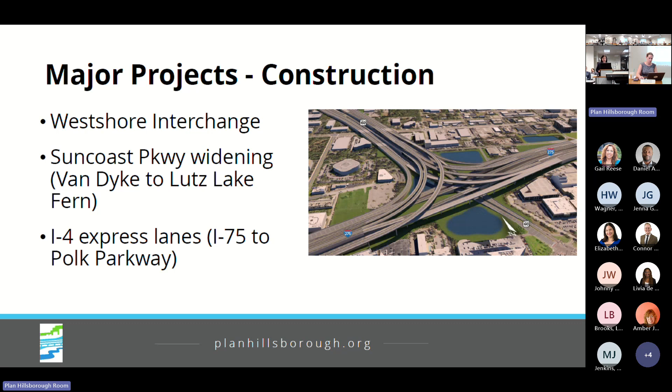Our partners at the Turnpike are continuing to advance the Suncoast Parkway widening in the northern part of the county. And DOT is accelerating development of two lanes, one in each direction, on I-4 from I-75 to the Polk Parkway.

As we mentioned last time, there are 6 projects totaling about $32 million around the Hillsborough College area. As that redevelopment project is still in the works, these projects are put in the TIP to address whatever ultimate development will be placed there.

DOT is still actively determining what these investments will be pending the land use decisions. But the two things they do know for certain: planning to widen this segment of Air Cargo Road and Tampa Bay Boulevard to have more capacity, as well as adding a signal at Dale Mabry and Steinbrenner. The rest of the projects are in there - they know intersection and safety treatments will be needed, but that money is being put aside as more details are confirmed for this redevelopment.

Just wanted to bring a few projects to your attention, like what was going to start construction soon, so in fiscal year 27. Within the city of Tampa, there are some intersection improvements near Busch Gardens, near Annie Street and 30th. Rigid pavement reconstruction at Adamo and 34th Street. Repaving of Hillsborough Avenue in the central part of the city from Park Road to Central Avenue. And then a traffic operations improvement near the University of Tampa at Kennedy Boulevard and Plant Avenue.

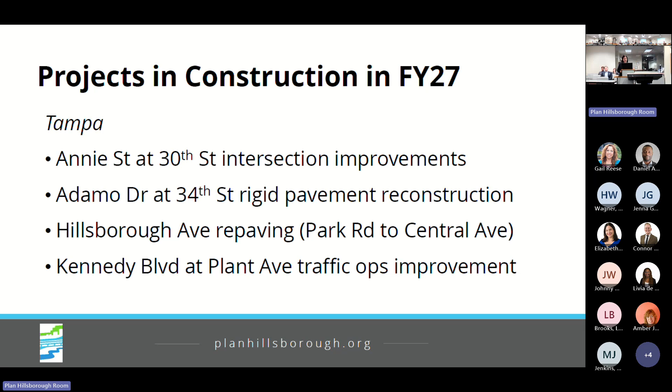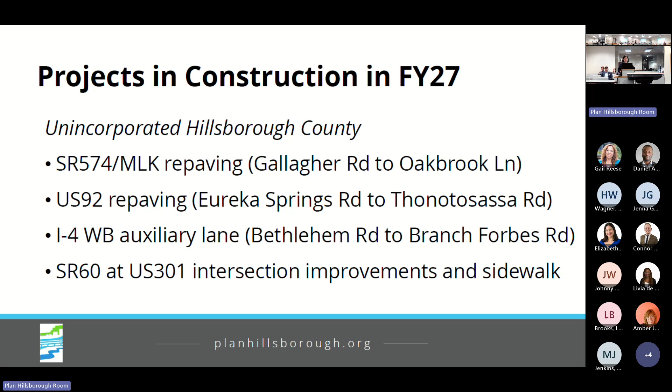Looking out into the unincorporated part of the county, mostly East County, a repaving of MLK from Gallagher to Oak Brook, as well as a repaving of US 92 from Eureka Springs to Thonotosassa. DOT is still moving forward to adding a westbound auxiliary lane on I-4, a small segment from Bethlehem to Branch Forbes Road, just to continue to help move traffic on I-4. So this will still advance independent of those express lanes. And then at the intersection of State Route 60 and US 301, some intersection improvements that also include sidewalks.

Close to the I-75, I-4 interchange at the Mango Road and Old Hillsborough Avenue intersection, the county is working to put in a signalized intersection there. In South County by the new Moffitt Center, there are more intersection improvements planned for the intersection of State Route 674 and College Avenue. Plant City will see some new sidewalks come online around their middle schools.

And then the last project I wanted to bring to your attention, because it's gotten some interest from the Citizens Advisory Committee, is that the I-275 widening from Hillsborough to Bearss, which is in our long-range plan, which is a priority project. This year it's also in the TIP, but there's no funding program to it, so if you look closely at all of these columns, you'll just see a bunch of zeros. And in full transparency, I wanted to make sure the TAC knew this project was in here. But what we've heard from Secretary Hall is that this project probably won't advance until like 2035.

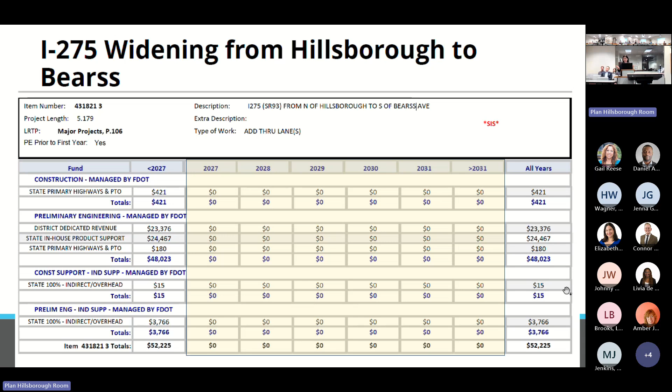That's consistent with DOT's cost feasible plan - not really much to see here, but again, in the interest of transparency, wanted to bring that to your attention. This is just a snapshot of essentially DOT's long range plan, their SIS cost feasible plan, that shows that design should occur sometime between 2035 and 2040, and then construction is tentatively planned to occur sometime between 2046 and 2050.

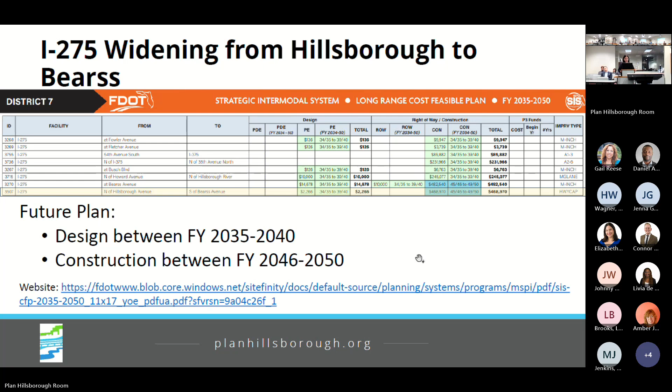So we're getting to the home stretch with the TIP. We've mailed all of our flyers, put out road signs, did newspaper ads. We have this meeting, the CAC, and then it'll go to the TPO board for adoption next Wednesday. So the requested action is that the TAC consider recommending approval of the TIP, but I'd be happy to answer any questions or comments you might have.

Okay, thank you. Any questions from the committee?

I have a question. So last time we talked about this there were projects that moved out and things that moved in, and there wasn't really a good explanation, and I'm not here to rehash that, but it looks like several projects added around Hillsborough College. Were there projects that moved out because of that, or was that new money?

That's a great question, and I'll start and we'll see if you have any other thoughts. My understanding of that money around Hillsborough College, that's not part of the SIS reprioritization - they are separate. Alyssa Joyner at DOT: those projects came down from central office and they weren't a part of that. The SIS reprioritization happens annually and kind of shuffles around those projects, and these didn't come out of that or move anything else out of the TIP or anything. Okay, thank you.

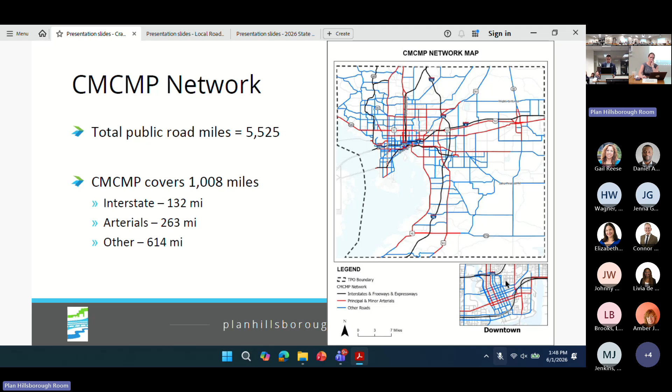Once we have the baseline, we want to identify where the congestion is—what we call congestion hotspots, identifying which roadways are most congested. We used a couple of measures: first, percent time congested, identifying roadways congested 50% of the time or more. We also evaluated vehicle hours of delay, picking out the most congested roadways with significant delays. Last but not least, the planning time index, which measures travel time reliability from the driver's experience, identifying the least reliable roadway corridors within the county.

Based on this evaluation, we identified about 170 miles of congestion hotspots within the county, which you can see on the map on the right—the red segments are the congestion hotspots.

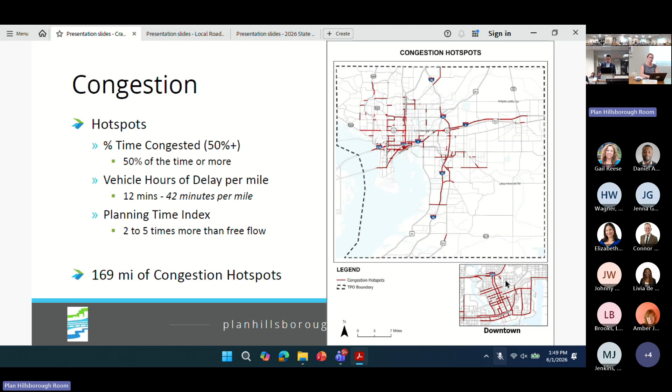The second category is safety hotspots, where traffic safety problems exist. Based on data evaluation of traffic crash data, crash frequency, and severity, we identified the top 25 safety intersections, and also about 140 miles of safety corridors that have safety issues.

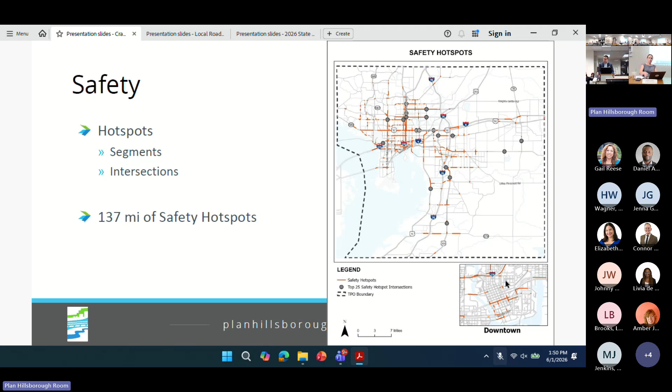So last but not least is the resiliency. We really try to understand what if extreme events happen, which roadways will be affected. So we look at the storm surge 1 feet scenario, the sea level rise 1 feet, and also the 500 years rainfall that's going to cause flooding within the county boundary.

Based on this set of criteria, we have identified about 113 miles of resilience hotspots. As you can see, the red segments on the maps are along the coastal area. You can also find some corridors inland where the elevation is lower.

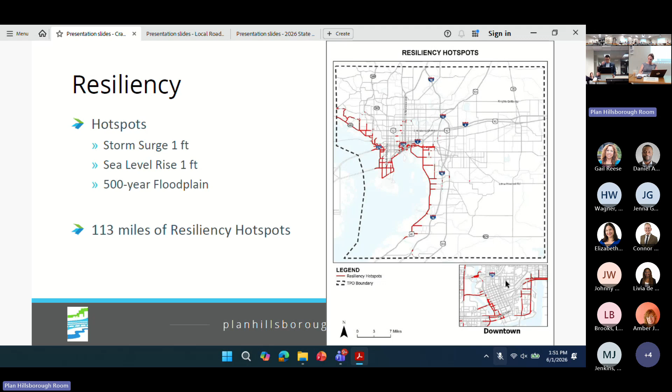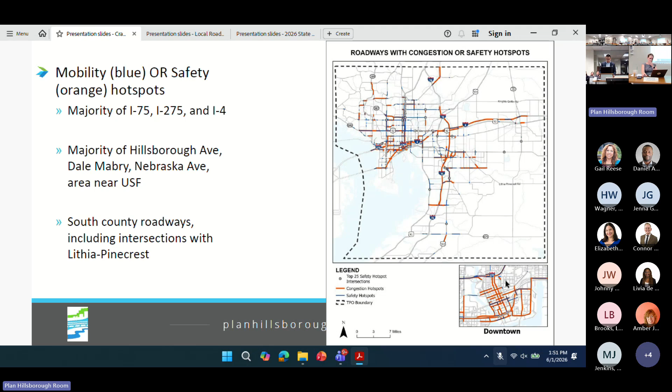So we specifically focus on the congestion and safety hotspots so that we can know the big picture of where the problem is. As you can see from the map, the majority of I-75, 275, and I-4 are part of this bigger group of hotspots, and also the majority of Hillsborough Avenue, Dale Mabry, Nebraska Avenue, and roadways near USF. You can also find some roadways in the South County area where there might be congestion and safety hotspots.

Once we have that, the next step we did was focus on the roadway corridors that are both congestion and safety hotspots. Those are the kind of corridors or areas that we should prioritize our resources or attention on in the next couple of years.

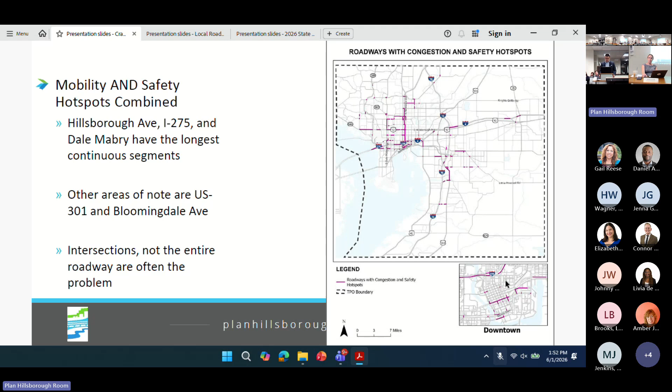So we look at roadways with both congestion and safety hotspots, as you can see from the map on the right. Hillsborough, 275, Dale Mabry have the longest continuous segments, and you can also find corridors that cross the city and the county boundary. This gave us an unranked list of corridors which have both congestion and safety issues.

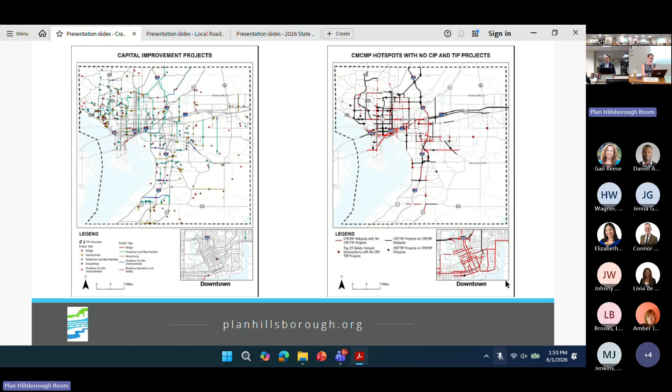Let's skip this. So once we have all the data evaluation, the next step is we want to know where we should implement strategies. But the first step is to leverage existing or planned projects so we can identify which corridors do not have any planned or existing projects. So we overlay our hotspots with the capital improvement projects. I'll show you on the next slide.

As you can see from the map, these are all the CMP network segments we have evaluated. The black corridors are roadways with existing transportation improvement projects. The red ones do not have any planned or existing transportation improvement projects. Most of the gaps can be found on Hillsborough Avenue or Dale Mabry. If you look at the downtown zoom-in map, a lot of downtown streets, Selmon Expressway, and Kennedy Avenue don't have any planned or transportation improvement project right now.

Another effort that came out of the CMP effort is this: we developed a strategy toolbox because we think there's no one-size-fits-all strategy to deal with different traffic problems. So we developed a strategy toolbox to help planners and engineers deal with different traffic problems. This toolbox also comes with implementation cost and implementation timeline, so planners and engineers can have them handy when they try to solve different traffic problems or safety issues.

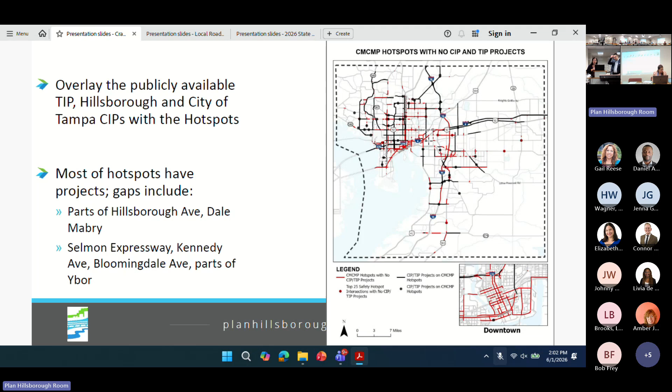Okay, any other questions? Okay, I guess we will need a motion for this one. And it's right there on the screen conveniently for you. Recommend that the TPO board accepts this CMCMP update.

Okay, so a motion, a second. Any other discussion? All right, seeing none, everybody in favor say aye. Aye. Anyone opposed? Okay, motion carries unanimously. Thank you.

The next item on the agenda is the local roadway resilience countermeasures, with Matthew Pleasant from Applied Sciences and Wade Reynolds, TPO staff, introducing him. This has been a great study, and I think we've put together a great toolkit of options to use, and these exemplary projects are a good start. Thank you all.

Good afternoon, Matt Pleasant, Applied Sciences. So you guys actually just saw this a couple of weeks ago for status, so here to present the final product. A lot of the presentation is highlights from the guidebook, but I'll go through it as a reminder of what we were looking at.

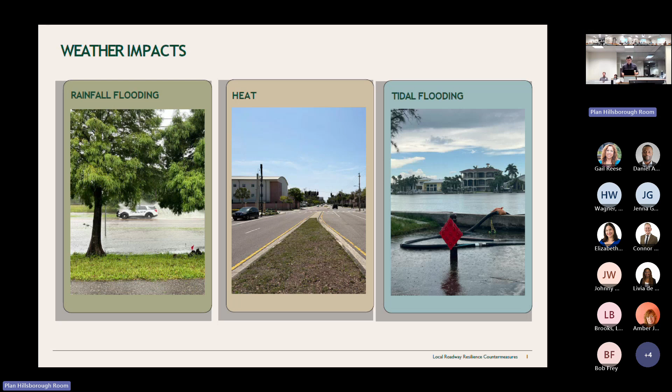So you might see an acceleration of the need for maintenance, the shortening of the infrastructure lifespan, and then the impact on the basic level of service and our ability to use roads during certain conditions. And then the impact on drivers, bicyclists, and pedestrians and their comfort. So we wanted to speak to all 3 of these.

So just to go back to a project overview of the steps that led us to this point: we started with corridor selection. We wanted to find 3 representative corridors that were emblematic of these threats, not necessarily find the solution for these, but use them for strategy development, developing ideas.

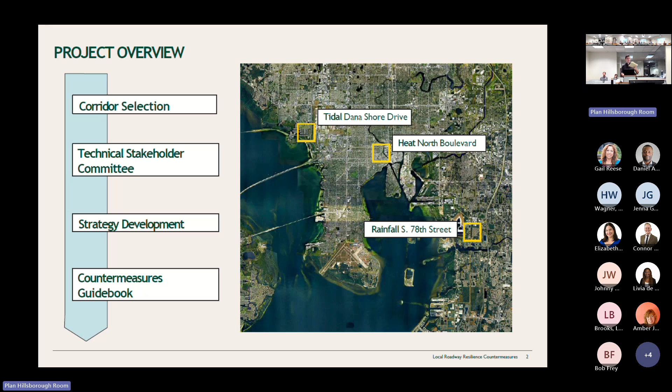We brought those to a stakeholder committee made up of engineers and planners from the county, the airport, and had a really great discussion with them about what they're already doing, what they would like to do, and some of the challenges they're facing. Then we moved into strategy development and pulled everything together into a guidebook, which will be today.

So the guidebook is meant to be very well illustrated, packed full of examples with costs. You'll find a lot of those organized by the threat: by heat, by tidal flooding, and by rainfall flooding.

And with each, it was helpful for us, and we thought helpful for practitioners, to develop a diagnostic framework. So if you're looking at an area facing these issues, how do you even begin to think about what might actually be a solution? I'll show a couple of examples of that. And then for each of those representative roadways, we presented it as a case study where we applied that framework.

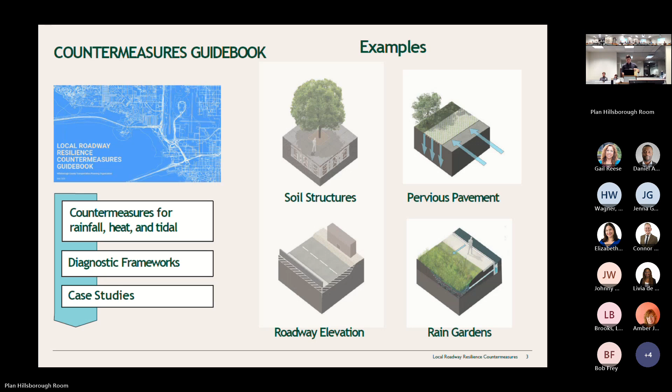So this is an example for rainfall flooding, presented as a series of questions. Some seem really basic, like where is it flooding, but you got to start somewhere. Then, where is the runoff occurring? Where are the bottlenecks in that stormwater system contributing to flooding? Defining costs - what can we actually affordably achieve? We're trying to think of a solution, and then evaluating maintenance.

Is it simply a maintenance issue that's contributing to flooding? And then if it's in a coastal area, you'd also want to see if that rainfall is actually being impeded by tide elevations too. So that's happening in plenty of places already.

So really, this is kind of trying to pull back the curtain a little bit. These questions get asked a lot with the stormwater master planning process that we go through a lot, and it's a process that's happened parallel to transportation planning, land use planning. There's plenty of interesting data that you can input to these that mirrors a lot of what the planning commission is concerned with, TPO. So part of what we were hoping to do with this project is kind of pull that curtain back a little bit, break down that silo a little bit.

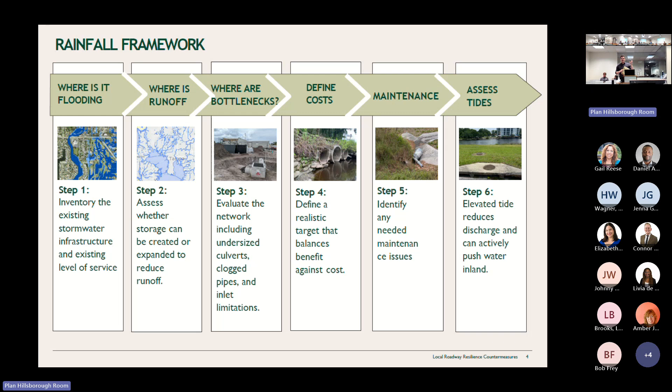So I'll go through some of the strategies now. So rainfall strategies - one that we included here is permeable pavement and permeable pavers. There's actually two different categories of these, broadly speaking. Permeable pavers have a little joint between them that allows the water to infiltrate between them. And then there's porous concrete where the water can actually absorb through the concrete. That's what that picture is, the lower hand side. That's a parking aisle in Martin County. They've installed that in a roadway.

They actually elevated it as well, as part of this flooding solution. And you can see these permeable pavers. This in the upper right is an alleyway in Ybor that was recently developed. That's full of them and probably helping contribute to their ability to store stormwater. The issue with these is that they are more expensive, about 10 to 20% more expensive than these traditional materials. So I have to think that they were using those to help them meet some of the stormwater criteria for the development, to help them with reducing their impervious surface on the site. So it's kind of a smart use of it.

And then in the lower left is True Grid. That's actually a proprietary name for that product - there's different things, different products, but it's like a molded kind of grid that's full of that aggregate material. You can see it in parking lots that you go to. Bamboozle in Seminole Heights has that, probably for the same reason. They were rebuilding that property, making the restaurant. They're probably trying to meet some stormwater criteria on their site. So the parking area is full of that.

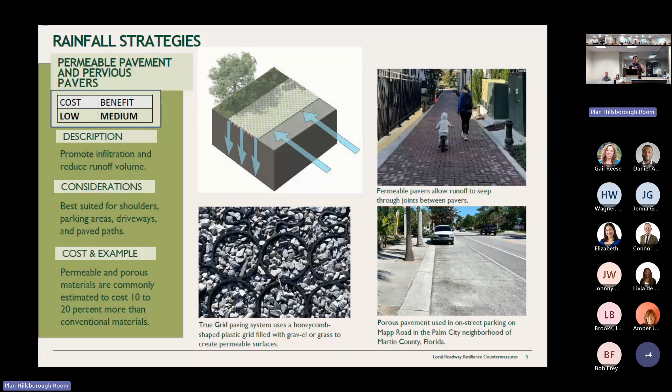So moving on to green infrastructure, this is a pretty big category that we're including, spanning anything from rain gardens, bioretention, and bioswales. We have some pretty good examples of this in Tampa specifically. I would say they're not widespread use yet, but we have some pretty good examples.

So the El Prado Stormwater Garden in South Tampa, that's El Prado - the city actually used some grant money from the SWIFT fund to buy 2 repetitive loss properties to turn into a stormwater park. Repetitive loss properties mean that they've been flooded more than twice, I think, in the same 10-year span, and they've had to file for claims. So there's a benefit to removing those properties from the floodplain, so they created this to help with stormwater in the neighborhood.

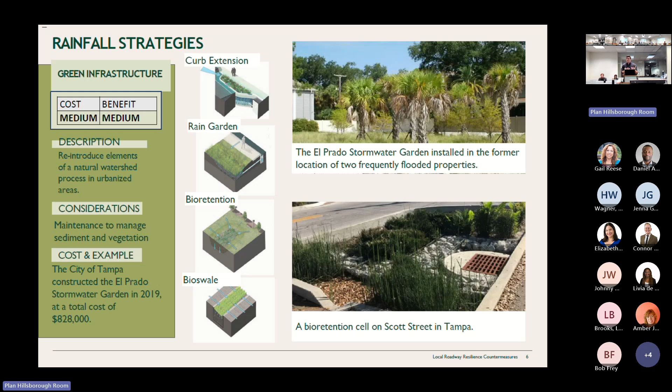If you go out to Scott Street, that's the picture below. That is all the way from Orange Ave over to 7th, across Nebraska. You have green infrastructure treatments all along that road. So you'll see things like these gabions that are acting as a baffle material to help filter the water, help it infiltrate. I don't know the story behind that, I don't know if anyone with the city can speak to why that was done specifically on Scott Street. I know it was done with a grant, but I'd be interested to know if they're trying to fix some sort of flood issue there - but it's an awesome example.

So the cities and counties that are really successful with their shade planning have done so with a comprehensive planning approach. A lot of these measures might be affordable in one place, but when we try to do it across the city, it's really hard to scale. So you have to develop your network, your shade network. So why we included this one - the city of Tampa has a relief program that is trying to implement this. But we hope it grows.

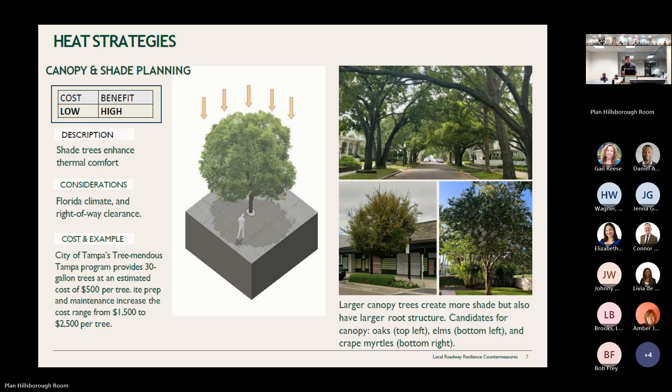And I think when we look at the shade plan that's going on, it really boils down to trees and structures and trying to remove those impervious materials. So this is a big one. Just going about it in a comprehensive way. And this is a key strategy I want to highlight.

You don't always have to implement things in a very permanent way. It can be kind of seasonal. So these are hydration stations. This is one the city of Tampa actually installed in East Tampa permanently, and also deploy these seasonally.

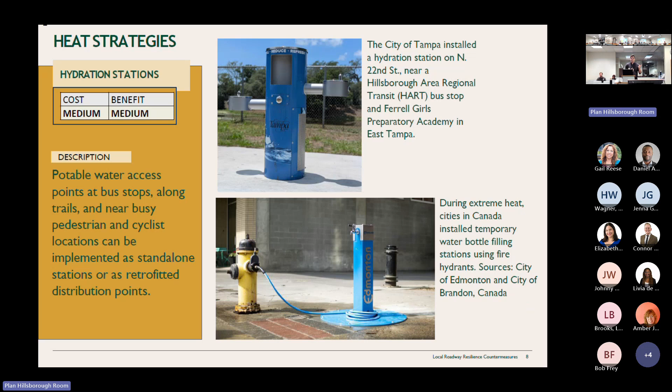This is a water bottle filling station in Edmonton, where they have these issues all the way up there as well. So they can hook these up to their hydrants. I don't know if the hydrant is usable or not, that's going to be the first question to find out, but it's a pretty good idea.

So I will say that tidal strategies, those tidal flooding areas, are probably the most difficult to solve. They almost always involve some sort of significant investment. Things like roadway grade elevation become a very serious discussion about how it's going to impact adjacent properties, which impacts feasibility from a cost standpoint, because you're not just elevating the roadway, you have to look at how it's impacting adjacent properties too.

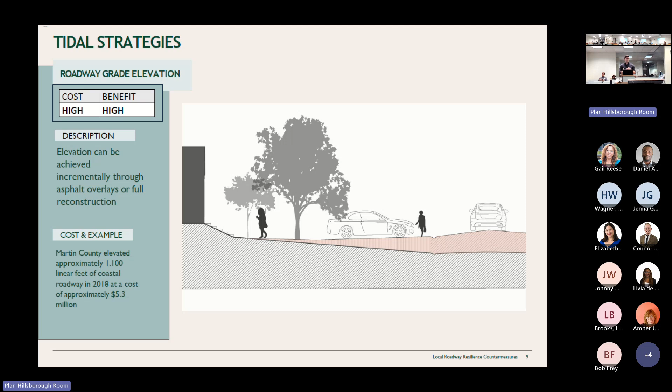Backflow preventers are just going to help with that sunny day flooding issue. It's kind of a safety measure put on the outfall to prevent tidal water from flowing backward through your stormwater infrastructure and flooding the streets, causing that sunny day flooding. We do have areas in Tampa that are impacted by this.

This is not a cure-all for flooding. It actually creates a correlated issue with rainfall, since you need enough head pressure coming down to actually open up the backflow preventer. So it can actually cause some rainfall flooding.

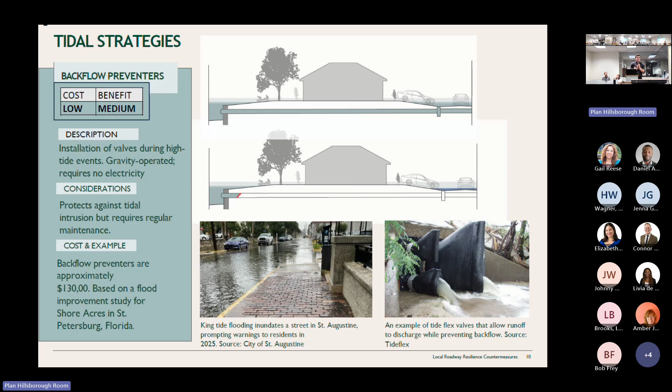So our case study for the tidal areas was Dana Shores Drive. This is in Town and Country. It was highlighted in the Tampa vulnerability assessment as an area that has issues. It's actually managed by the county. And we kind of ran through this framework with Dana Shores.

We looked at and updated some of the stormwater modeling for the area, plugged in the new sea level rise numbers for the future year scenarios that the state requires as part of vulnerability assessments, and the current year flood situation with the 10-year and the 25-year flooding.

You're seeing this because that's what it's typically designed to. Right, so look at that - the low point in the road is a stretch where Dana Shores Drive kind of turns east. And that's a known issue, it shut down during Hurricane Debby.

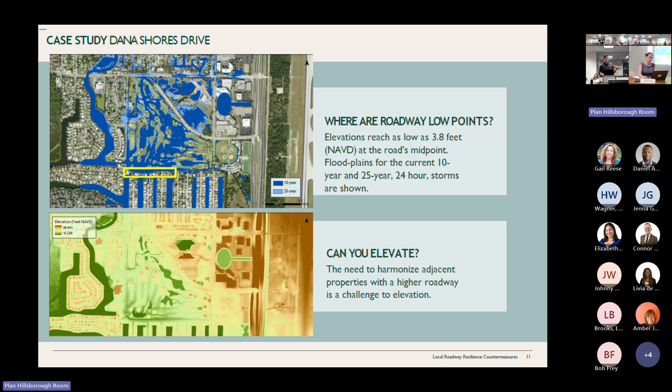And so you look at that - could you elevate? You could, but then you would run into those issues pretty quickly with the impact on adjacent properties.

We looked at how the stormwater infrastructure is intersecting and interfacing with this tidal area. There's a series of outfalls throughout the neighborhood, two that are kind of more limited in capacity. Basically what's happening is the stormwater runoff is trying to sheet flow over Memorial Highway to the north and down into Rocky Point Golf Course, which is right there in the middle, and it's having trouble trying to get out from that area.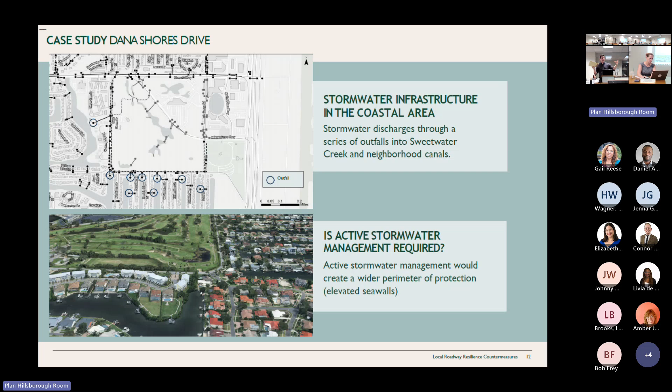And then we looked at whether you would want to move from a gravity-based stormwater system to an active stormwater solution to kind of open up the roadway. So again, you could do that, but the undertaking would involve working with these private property owners to elevate seawalls, to create that constant perimeter protection you'd need to make something like a stormwater pump work in the city.

Some of the things we would recommend are reaching out to the Tampa Sports Authority and working with county parks. The Tampa Sports Authority doesn't own but manages the golf course - the city of Tampa actually owns the property. Work with them to find capacity there, and potentially at a nearby county park. Then long term, assess and identify potential applications for that.

This is the last section here: North Boulevard, our key corridor. It's identified in the Sun-Heat playbook, being particularly sensitive to heat because of physical factors but also social factors in this area. So we looked at how much right of way exists, how much is paved, and how much planting canopy to actually introduce.

If you're in the corridor, look at the new Publix that was built there. They did build it with a structured canopy, and there are also arbor trees there - larger, closer together, providing shade today. So that's nice to see. There are power lines on the southern end, so we looked specifically at two sections of North Boulevard: north of 275, and south of 275 down to Cass Street.

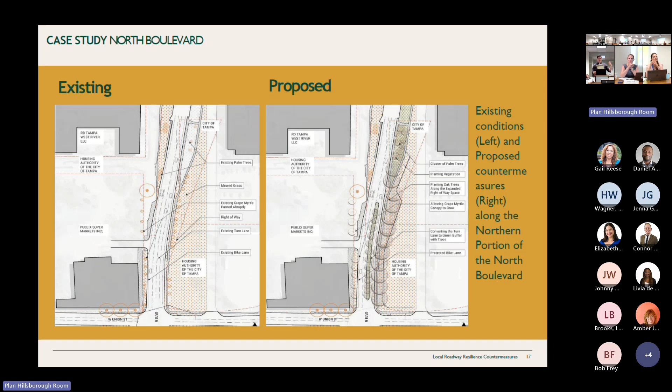Those are our main recommendations for around there. A long time ago, North Boulevard used to be four lanes, and at some point it became two lanes, leaving a remnant of a turn lane. It's actually gotten even narrower now because they added a raised curb so people can't make that left turn into the Publix. So maybe just get rid of the turn lane entirely, so we could have that planted in the center - that's our main recommendation there.

That wraps up the project. We hope it's useful for planners, practitioners, and the public to use. The point is to really try to get these ideas considered at the planning stage, so they can actually get consideration and make their way into the projects that we see. With that, thank you. Any questions from the committee?

Since I don't see anybody else - maintenance cost is always a concern for us. I'll give you a couple examples: pervious pavements generally have more intense maintenance needs. As for planting trees, don't take this as me being opposed to trees, but we have a significant problem in neighborhoods where trees planted between the sidewalk and the curb grow as we want them to, and then they lift the sidewalk up, becoming a big maintenance issue. Hopefully maintenance is being considered in all this.

Yeah, because we don't do a great job of funding maintenance. I can attest to that too, formerly being with the school district - it was always like, is this the school's tree, the city's, or the county's? Who's in charge of trimming this? We all love trees, but it becomes a management issue. One thing I can say is that with permeable or porous pavement, just like standard stormwater infrastructure, they're going to be subject to sedimentation and you'll have to service that. It's still better than an impermeable surface, but you will have to service it, so it's something to consider early in the planning.

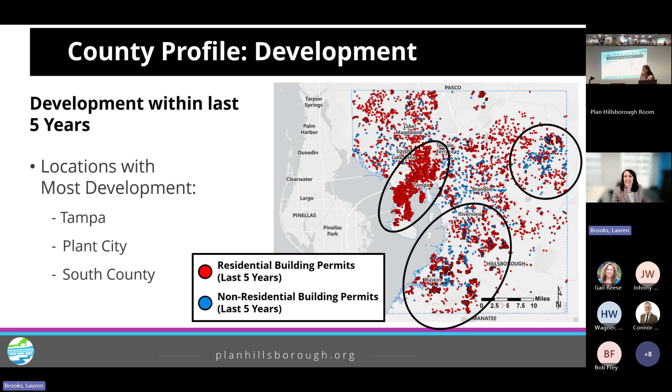We were able to gather residential and non-residential permits over the last 5 years. This was kind of interesting. Of course, there are clusters of development occurring within the cities of Tampa and Plant City, but you can also see there are quite a few clusters within South County, and the county as a whole shows a lot of growth happening or occurring.

So in terms of our transportation network factors, we actually organize these by project program categories. I wanted to mention that we worked closely with the Congestion Management and Crash Mitigation Process Team, or CMCMP team. So you may see some overlap in the information, but our goal was to help tell the story of this data, put all the pieces together.

So we looked at planning time index, thanks to the CMCMP team who helped us gather that information, but we focused predominantly on the FDOT roadway network. Anything with a PTI, or planning time index, with a value higher than 1.5 means less reliable travel conditions or more travel time on the roadway. So looking at the FDOT road mile network, 61% is in that red or orange, higher than 1.5. So we have quite a bit of congestion, and that's what this index is demonstrating.

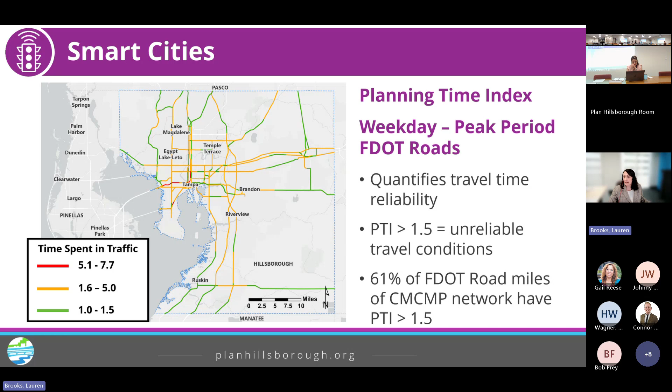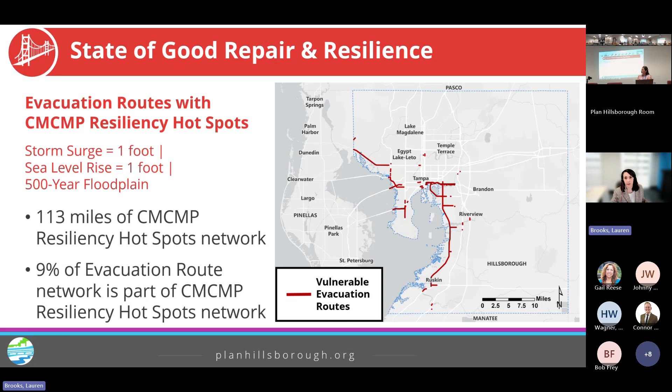Moving on to state of good repair and resilience. If you recall from that CMCMP presentation, they showed the roadway network that would be inundated by particular scenarios: storm surge equal to 1 foot, sea level rise equal to a foot, and the 500-year floodplain. Comparing that with the evacuation route network, actually 9% of the evacuation route network would be inundated under this scenario.

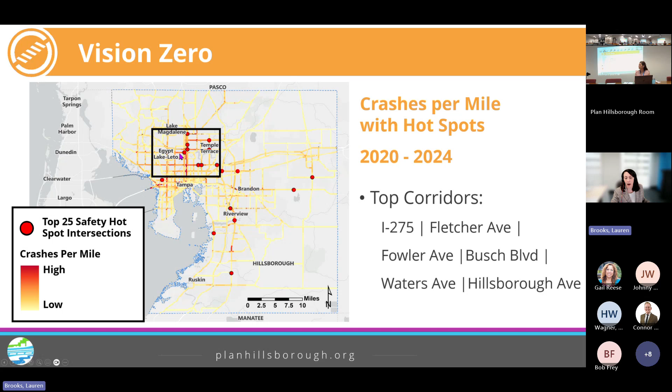Moving on to Vision Zero, or the safety aspect of the program. Obviously I-275 has quite a bit of crashes, that's probably the top corridor. But roadways that provide access to I-275 to and from also have quite a high number of crashes. Those roads include Hillsborough, Waters, Fowler, Fletcher, Busch - so really prominent in the North Hillsborough County area.

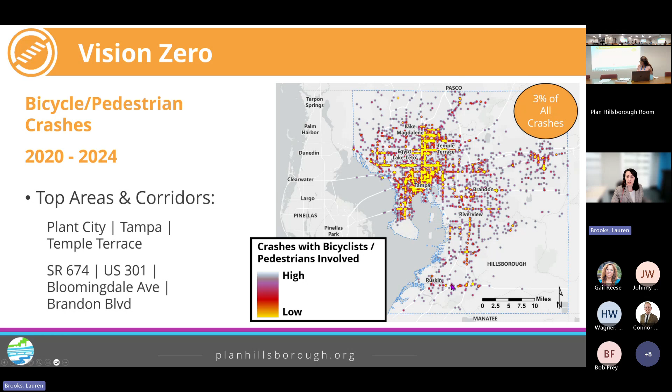So we looked at bicycle and pedestrian crashes. Again, not surprising, the majority of the crashes occur within the cities of Hillsborough County - Plant City, Temple Terrace, and Tampa. But there were quite a few crashes clustered along some of those roadways in South County, such as State Road 674, US 301, Bloomingdale, and Brandon Boulevard. So just wanted to note some of those interesting statistics.

I wanted to thank Jesus for his hard work providing us a lot of information from HART. Looking at HART's active bus fleet, this might be a surprising statistic, but over half of the active fleet - and this also includes vehicles used for contingency purposes - is operating past service life. So kudos to HART for still operating a great system, but with vehicles that are overdue.

For the major projects for economic growth, we focused on those activity hubs of our area, trying to understand interesting statistics from our major partners such as Tampa International Airport and Port Tampa Bay. Thanks to the airport, we received number of passengers within the last 5 years and number of flights, and it's amazing - number of passengers has grown by 81%. 2024 was the highest year, and in terms of flights, there was a 63% increase in the last 5 years.